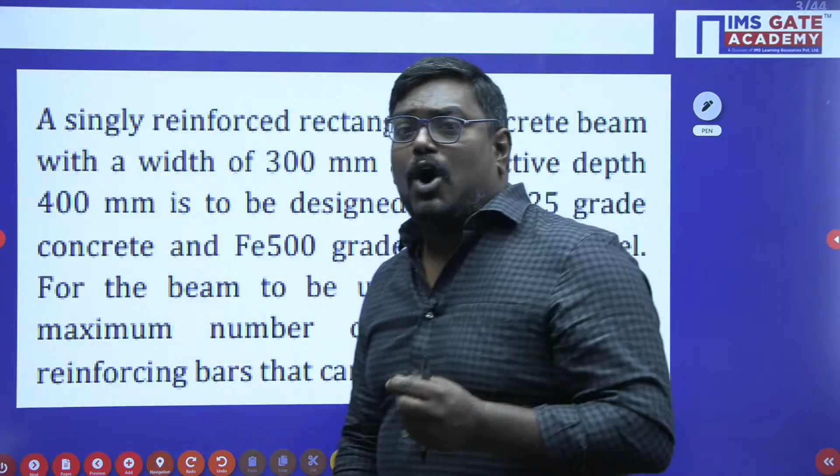Quickly I will move on to the top 10 challenging questions topic. Here we have a beautiful question. When I talk about this question in RCC, it has a weightage of around 4 marks in the GATE exam. Whatever questions I cover, please concentrate on these topics rather than the questions themselves, and give more importance to the concept.

Here is a question: A singly reinforced concrete beam with a width of 300 mm and an effective depth of 400 mm is to be designed using M25 concrete and FE 500 grade. For the beam to be under-reinforced, what is the maximum number of 16 mm diameter bars?

Let us understand what we mean by under-reinforced, over-reinforced, and balanced section. Practically it is impossible to have a balanced section. Then your friend will ask, sir, why are we assuming a balanced section? To find the depth of the neutral axis, we assume the section to be balanced.

What do you mean by under-reinforced? When the amount of steel provided is less than the amount of steel required, we call it under-reinforced.

If you consider a match between India and Zimbabwe, Zimbabwe are rated as underdogs. So under-reinforced means whatever is required is provided less. Here the failure is obviously in steel because you are providing less steel. Since steel is a ductile material, it shows a clear sign of failure. That is why practically all sections are designed as under-reinforced.

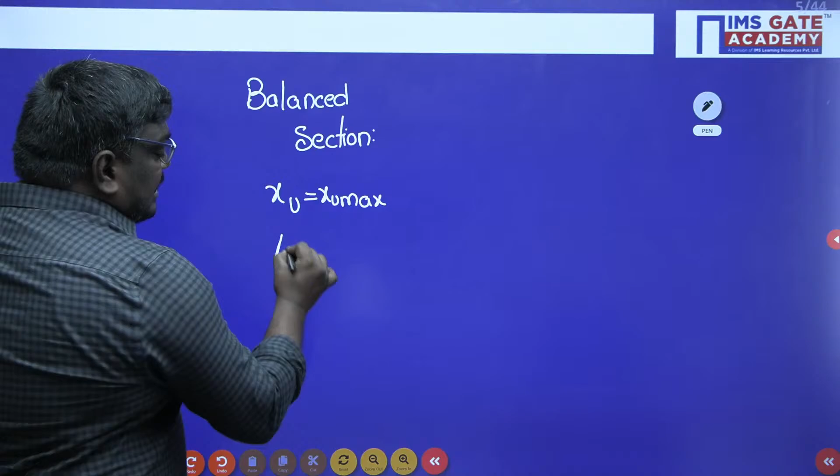Now, for a balanced section, what do you mean? That means the amount of steel required to balance the section, that much amount of steel is provided. So the conditions for balanced section are XU equal to XU max, and AST equal to AST limiting.

If I consider the section to be balanced, we can find the limiting area of steel, by considering compression force equal to tension force. Compression force is 0.36 FCK B into XU max, and tension force is 0.87 Fy into area of the steel.

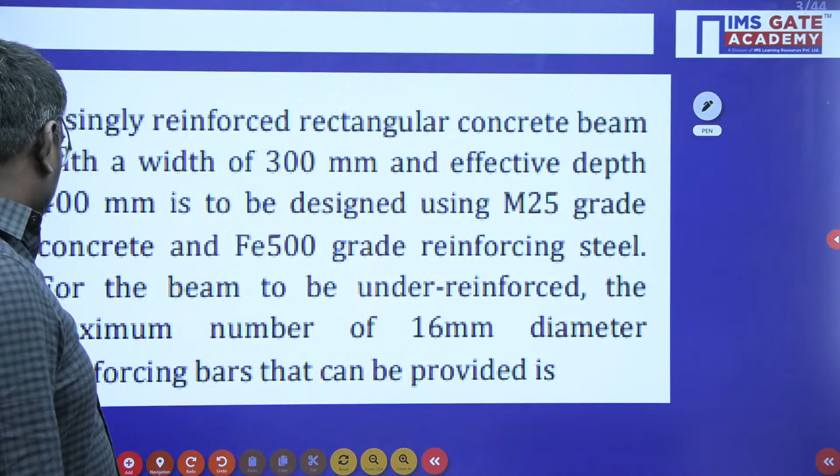So what is the grade of concrete we will see? The grade of concrete is M25, the width of the section is 300, and effective depth is 400. Now based on the grade of the steel, XU max values change.

If it is mild steel or Fe250, XU max value will be equal to 0.53D. If it is Fe415, HYSD bar - high yield strength deformed bars - we call it 0.48D. And if it is Fe500, this will be taken as 0.46D.

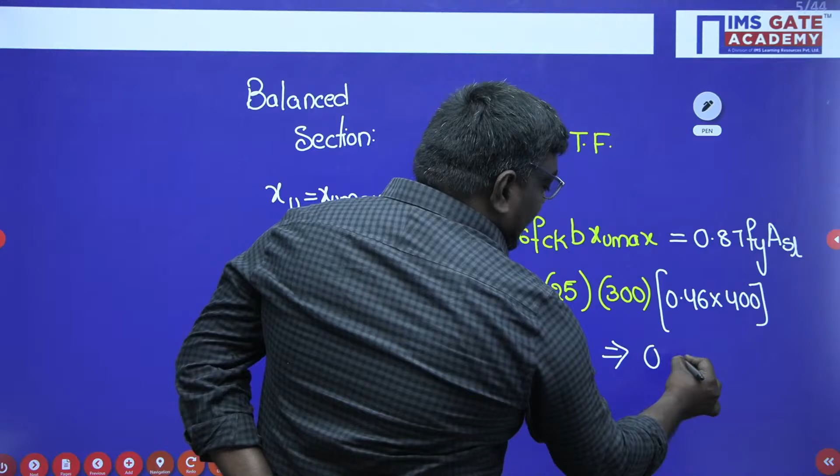In this problem, it is clear that the grade of steel is 500. So I will take 0.46 into D, where effective depth is 400 mm. Now let us solve: AST equal to 0.87 Fy, where Fy, yield strength of the steel, is 500. In balanced section, area of steel and limiting area of steel are both the same, so we take AST as the limiting area of steel.

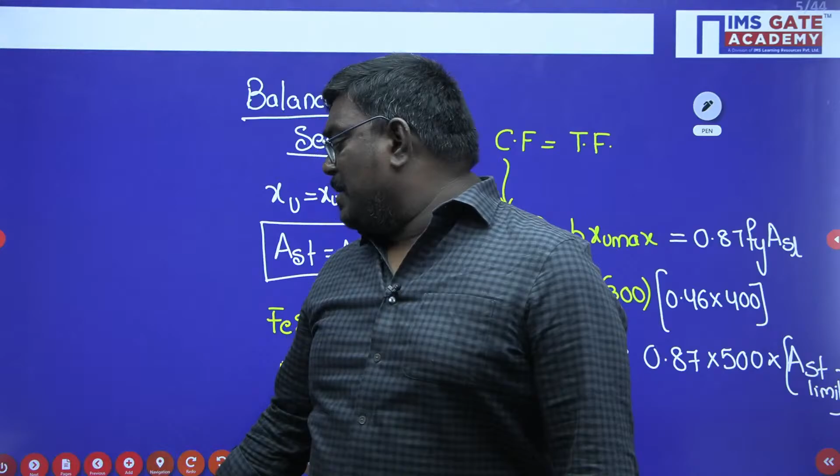Again, the grade of concrete is M25, width of the section is 300, effective depth is 400 - these are the values given in the data. Now we have only one unknown. So after solving, the limiting area of steel, AST limiting, will be equal to 1142.06 mm square.

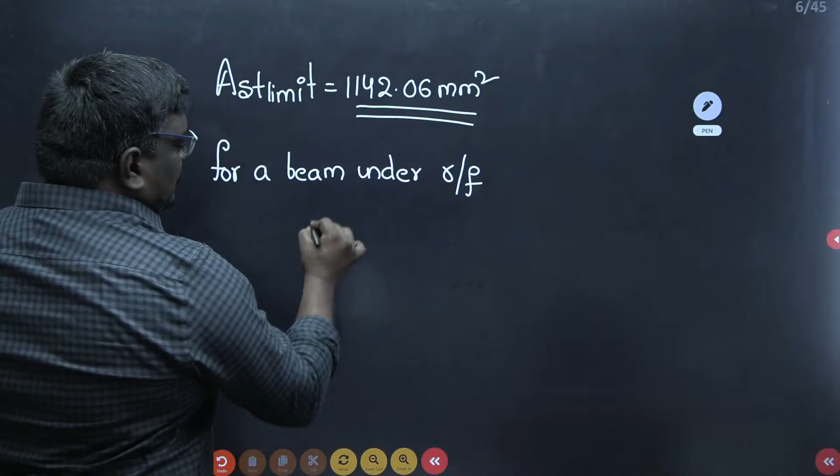But what he is asking is, for a beam to be under reinforced, what is the maximum number of bars? So for the beam to be under reinforced, AST should be less than AST limiting. He is asking for the number of 16 mm bars, so n into pi by 4 into 16 square is equal to 1142.06.

If you consider this, the number of bars you will get is 5.68. But most students might write the answer as 6. If you write 6, this is absolutely wrong, because when you provide more area of steel than the limiting area of steel, the section becomes over reinforced.

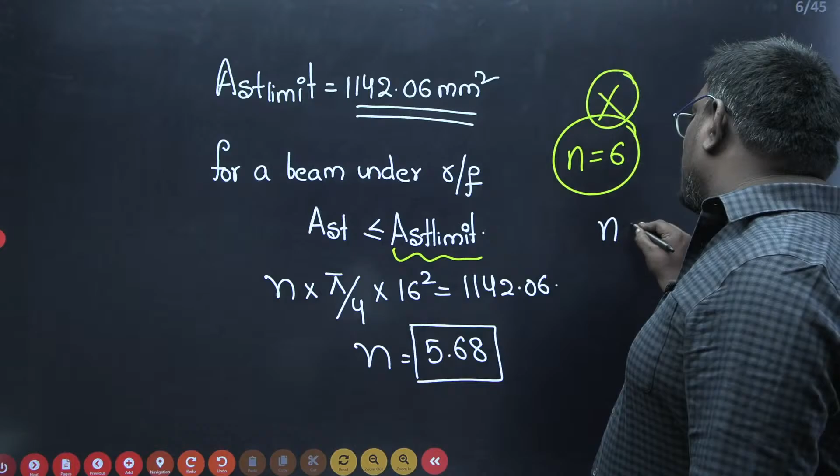But for a beam to be under reinforced, 1 16mm bar is correct, 2 16mm is correct, 3 16mm is also correct. But what he has asked in the problem is, what is the maximum number of 16mm dia bars? So in that case, my dear students, the maximum number of bars that can be provided for a section to be under reinforced is 5.

Again and again I am insisting and consistently telling you, for any section to be under reinforced, XU should be less than XU max, and AST should be less than the limiting area of steel. So my dear students, to solve this problem, first I have to find out the limiting area of steel. How can I find the limiting area of steel?

I assume the section to be balanced. Based on the balanced concept, I have calculated the limiting area of steel as 1142.06 mm square. But for a beam to be under reinforced, the amount of steel you are providing should be less than that.

So I have got number of bars as 5.68. But if you write the answer as 6, providing more steel than required, then it becomes an over reinforced section, where your assumption itself will be wrong.

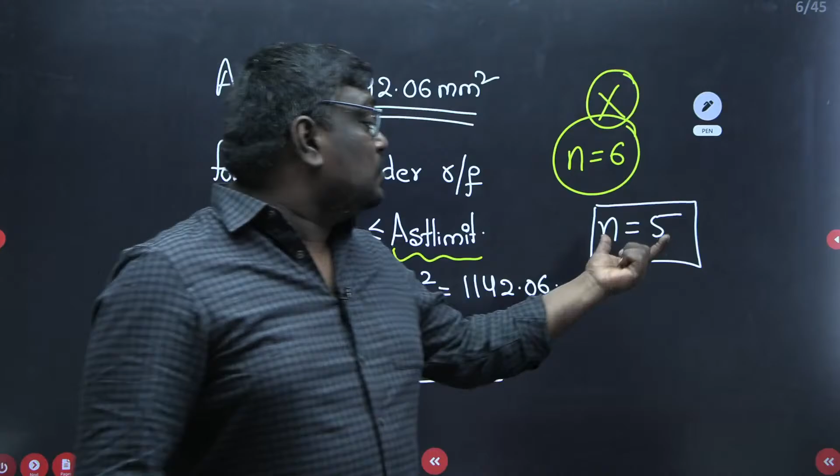But the beauty of the question is this - the answer could be 1, 2, 3, 4, or 5. But to eliminate that ambiguity, he has used the word 'maximum number of bars.' So when I consider the maximum number of bars, the answer will be 5.

I hope this solution is clear and you are enjoying this session. Now let us go into the next question.

Whenever you are following the GATE exam pattern or writing the GATE exam, it is my sincere advice to all GATE aspirants, whenever you are given a question, please go through it completely with the given data for at least 30 to 45 seconds. Because understanding the question and the given data, please write whatever the given data is on paper so that you can strike upon which formula you have to use. This is very important for your success in the GATE exam. So please read the question carefully.

A haunched varying depth reinforced concrete beam is simply supported at both ends. The beam is subjected to a uniformly distributed load of intensity 10 kilonewton per meter. Find the design shear force of the section. Beautiful question, let us see.

See students, it is a varying section. First of all, it is a varying section. Now, when I consider the design shear force, which we show as VDS - actually, design shear force can be written as VU plus or minus M by D tan beta. This is the formula to calculate the design shear force for a varying section.

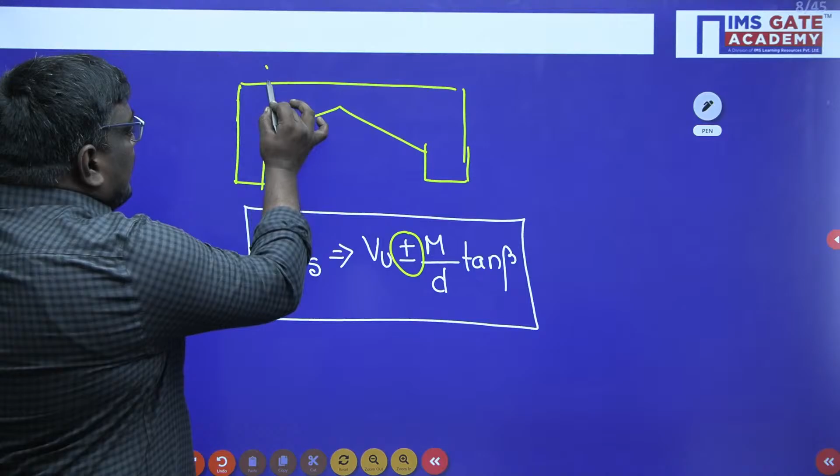Now the challenging aspect here is, when do you use the positive sign and when do you use the negative sign? See, here in a simply supported beam, if you consider the bending moment diagram, it will be something like this - maximum at the center and minimum at the ends. So my dear students, as the depth is increasing, the moment is decreasing.

In this case, you will use the positive sign. If the depth is increasing and the moment is increasing, then we will use the negative sign. Let us have clarity on this.

As depth increases, moment decreases. As depth increases, moment decreases. When the depth is increasing and the moment is decreasing, in this case, what will you be using, my dear students? You will be using the positive sign.

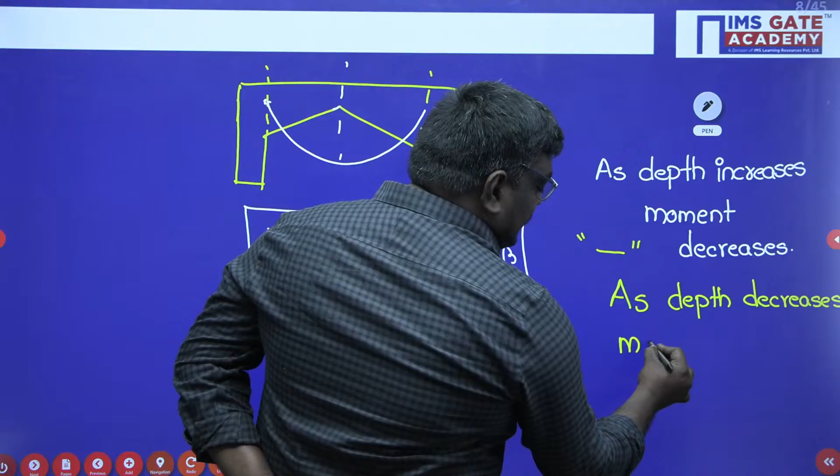Okay, now as depth decreases, moment... depth is decreasing, so here you can say moment is also decreasing. Or you can write here one more thing - as depth increases, to avoid confusion, moment decreases.

What, sir? See students, as depth increases, moment decreases. As depth increases, moment decreases. So here, as depth increases, moment decreases - depth is increasing, moment is also decreasing. In this case, you will use the positive sign.

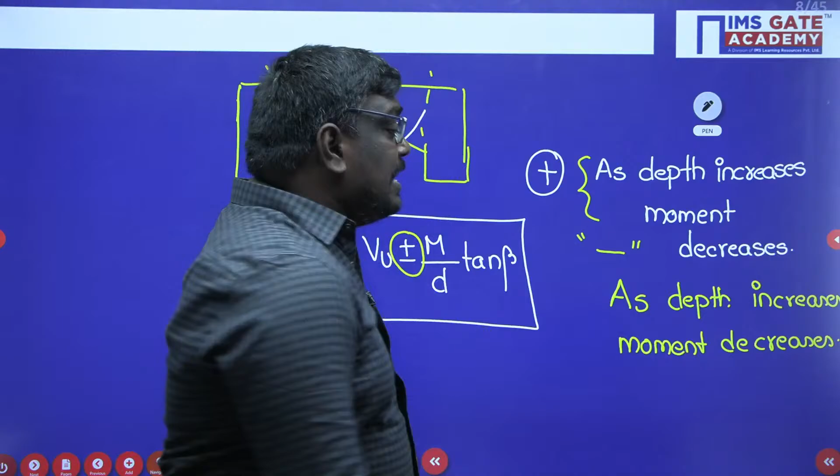When do you use the negative sign, sir? As depth is increasing, moment is also increasing. You should write here, moment increases.

Are you getting my point? One case is depth is increasing, moment decreasing. In this case, you will use positive sign. If depth is increasing, moment is also increasing, then you will use negative sign. So, in this question, whether we have to use positive or negative sign, the answer will be positive sign, because as the depth is increasing in this section, the moment is decreasing, so we will use positive sign.

So let us conclude that design shear force is equal to Vu plus m by d tan beta. Why are we having positive sign here? As depth is increasing, moment is decreasing, that is why we are using the positive sign.

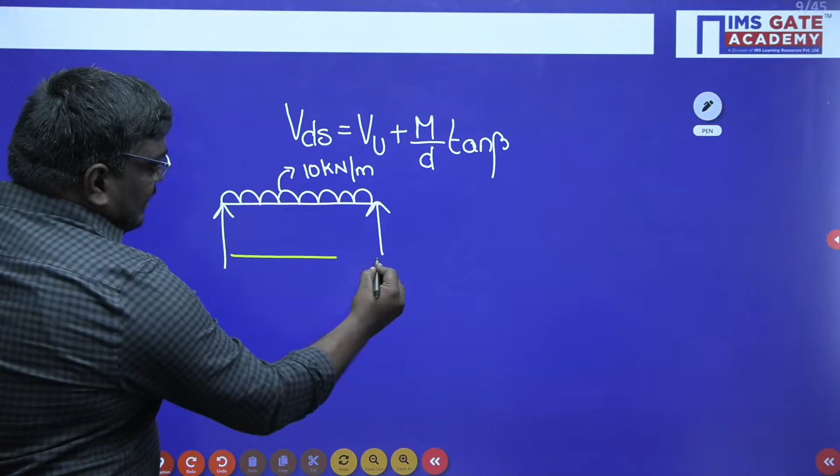Now consider a simply supported beam carrying a load of 10 kilonewton per meter, with a span of 20 meter. What will be the reaction here? It will be equal to WL by 2, and here also WL by 2. So this will be equal to 10 into 20 upon 2, which is equal to 100 kilonewton.

So the reaction at supports will be equal to 100 kilonewton. But he is asking what is the reaction at a section XX, which is at a distance of 5 meter. So if I calculate Vu, that is shear force at the section XX at 5 meter, you can write it as the reaction 100 minus 5 into 10, W into X bar. So the shear force at that section will be equal to 50 kilonewton.

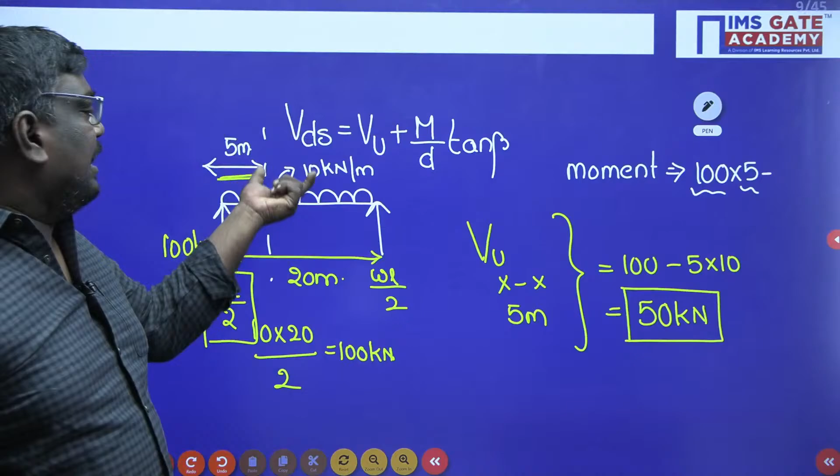Now if you talk about the moment, what will be the moment at that section at 5 meter? We have reaction 100, so 100 into 5, this is force into perpendicular distance, minus the UDL load of 10 kilonewton per meter occurring at a distance of 5 meter at the center. If you calculate this, moment will be equal to 375 kilonewton meter. Now, if you see, the depth at the center is how much?

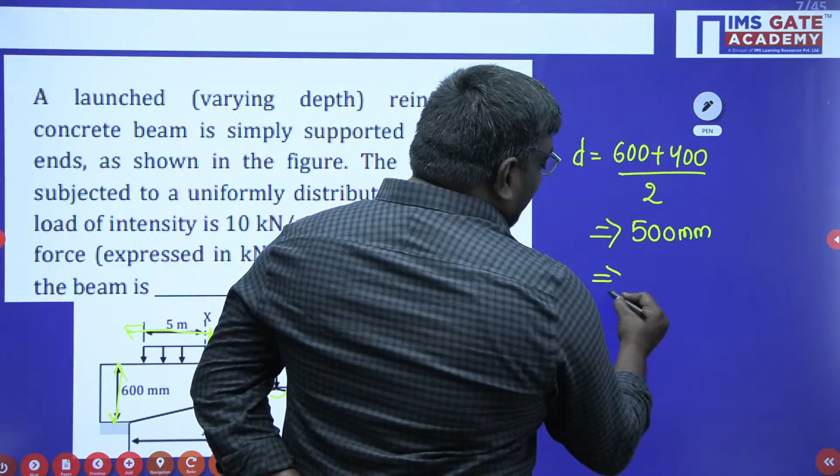The depth at the center is 400 mm, the depth at the support is 600 mm, and the overall span is 10 meter up to here. He is asking at the center. So you can directly write depth is equal to 600 mm plus 400 mm by 2, which will be equal to 500 mm, or 0.5 meter.

Now, if I talk about the design shear force at that section, we have the formula Vu plus m by d tan beta. What will be tan beta value? If you see the section here, the span from here to here is 10 meter, and this depth is 400 mm, and this will be equal to 600 mm. So this value will be equal to 200 mm, and this value will also be equal to 200 mm.

So what is this value beta? Here tan beta can be written as 200 divided by 10,000, because 10 meter is 10,000 mm. So if I calculate here, you will get tan beta is equal to 0.02.

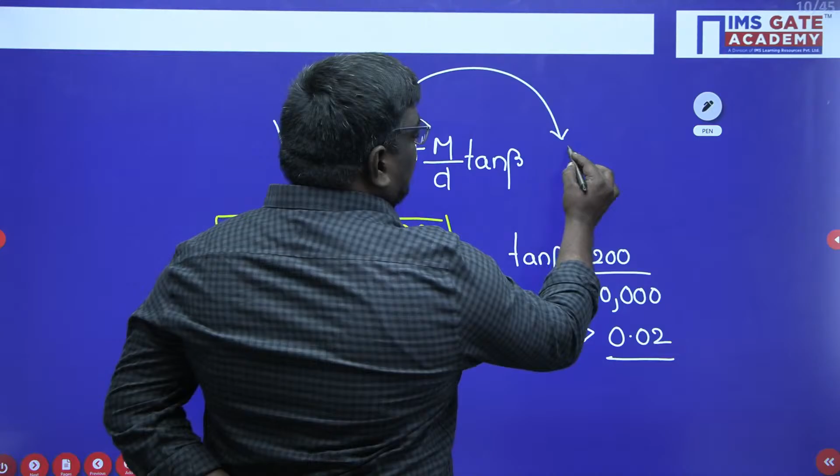Now when I talk about the design shear force, shear force is equal to 50, plus moment is 375 kilonewton meter upon depth, which is 0.5 meter into 0.02. So if you solve this, you will get 50 kilonewton plus 15 kilonewton, giving the final answer as 65 kilonewton.

So whenever you are solving the GATE question, you have to read the question carefully. If it is for a uniform section, whatever you learn in strength of materials, SOM, that is directly applicable here. But when I talk about a varying section, in the concept of shear, we will explain this: for a varying section, the design shear force is given by the formula Vu plus or minus m by d tan beta, where Vu is the shear force at that section, m is the moment at that section, and d is the depth at that section.

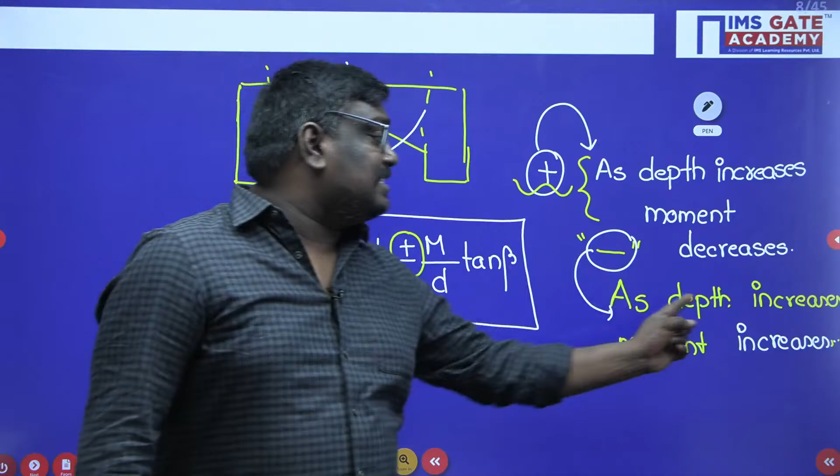When do you use positive sign? As depth is increasing, moment decreases, you use positive sign. As depth is increasing, if moment also increases, then you use negative sign. Sir, I have given you an example for a simply supported beam, we will be using positive sign there.

But if you see a cantilever beam, students, here the depth is increasing and at the same time the moment is also increasing. So in this case, you will be using negative sign. I hope you are clear with this problem and you have enjoyed it.

Now my dear students, this is a very important problem. Assume a straight line instead of parabola. For a straight line, partial safety factor is 1, and a rectangular under-reinforced concrete section of 300 mm and 500 mm effective depth is reinforced with 3 bars of grade Fe415, each of 16 mm dia. Concrete mix is M20. Find the depth of the neutral axis from the compression fiber, as per IS 456.

Now here I will tell you some important concepts. There is a method called limit state method. What do you mean by limit state method? Previously, there was a method called working stress method. But nowadays, people are using the limit state method because it is more beneficial from both the safety point of view and the economical point of view.

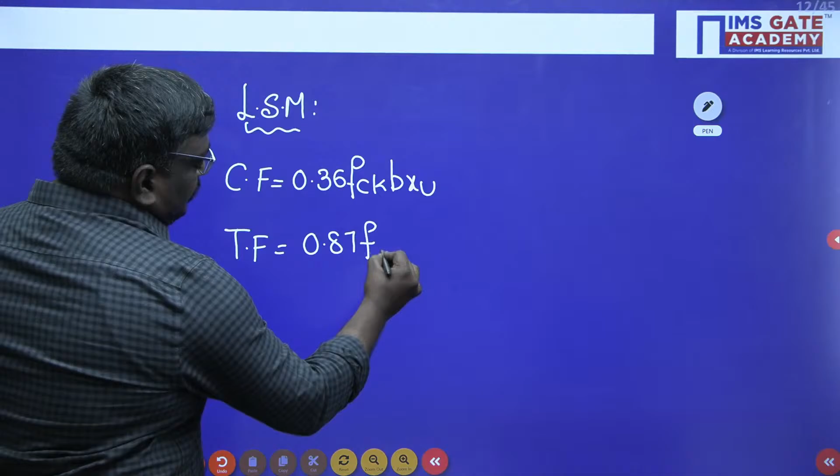In LSM method, the stress-strain curve is assumed as rectangular parabolic. Based on that, calculations give us compression force equal to 0.36 FCK B into XU, and tension force equal to 0.87 Fy AST. The lever arm is given by the formula D minus 0.42 XU. These are all the important formulas from the IS 456 code.

Now let me tell you the stress distribution in this problem. If I take this as a singly reinforced section, the stress distribution is triangular and rectangular, not rectangular parabolic as per the code. But in this question, they have given it as triangular, and the strain diagram varies linearly.

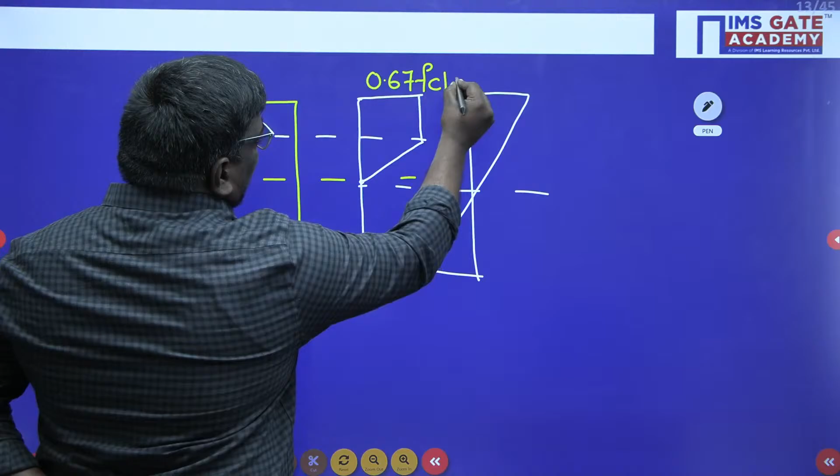Now see students, what is the stress given in the problem? It is 0.67 FCK. Why is it 0.67 FCK? Actually, the partial safety factor for concrete is normally 1.5, so when you divide 0.67 FCK by 1.5, you get 0.446 FCK. But in this problem, the partial safety factor is given as 1, so 0.67 FCK divided by 1 gives 0.67 FCK.

So I take the stress as 0.67 FCK, and the strain value is 0.002. If I take the depth of neutral axis as XU, I take this distance as X dash. Now from similar triangles we can write: here the strain value is 0.0035. How do I know 0.0035? From the code.

So here I can write XU divided by 0.0035 is equal to X prime upon 0.002. Now X prime can be written as 4 by 7 XU. So what will be the remaining value? The remaining depth will be XU minus 4 by 7 XU, which equals 3 by 7 XU.

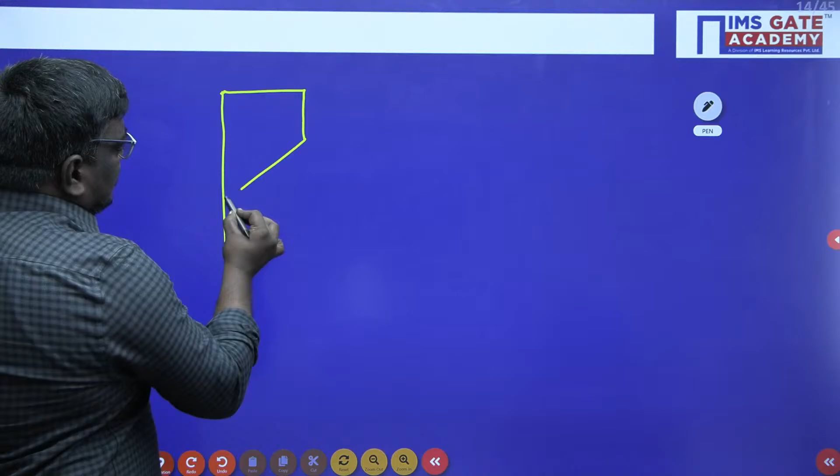Now we will write the compression force here. I am writing the diagram again for your easy understanding. This is 0.67 FCK.

This is 3 by 7 XU. And this value is 4 by 7 XU. Now my dear students, what will be this?

How to solve this: compression force, sir, how do you calculate force? Force is nothing but the area of the pressure diagram, or the area of the stress block. So compression force can be written as 0.67 FCK into area. Sir, this is a rectangular block, right? I can write it as B into

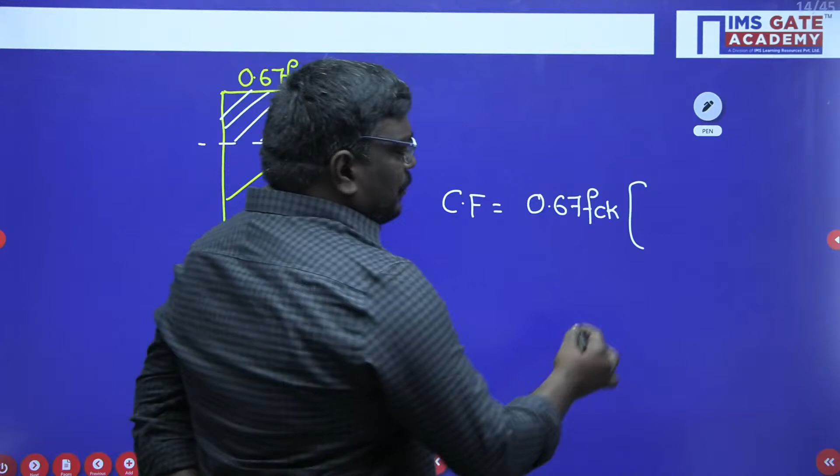3 by 7 XU. And for the triangle, how can you write it? This is the triangular part, which will be equal to half into base into height. So you can write it as half into B into 4 by 7 XU. So this will be the compression force.

Okay sir, now what will be the tension force? Tension force, there will not be any change. It will be equal to 0.87 Fy AST.

Now see, you know the compression force, you know the tension force. What will be the compression force, sir? What is the grade of concrete given there? 3 bars of Fe415, 500 mm, 3 bars, and M20 grade.

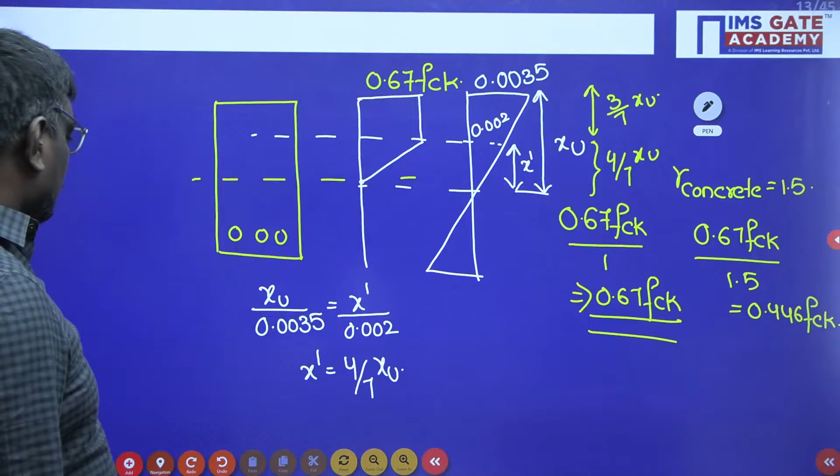Let us solve. Sir, compression force can be written as, if I write here, 0.67 FCK. FCK is how much, sir? 20 grade. 0.67 FCK, okay, B into XU.

Width is 300. XU you don't know. Plus B into XU, sir, plus half into

B is 300. Sir, XU means what? Here it is 3 by 7 XU, so into 3 by 7. Here it is B, 4 by 7. Half into B into 4 by 7 XU.

B into 3 by 7 XU is equal to... what is the grade of steel? The grade of steel is how much, sir? I think it is 415. So you should be writing 415, and 3 bars of 16 mm dia. So 415 grade of steel.

And how much, sir? 3 bars of 16 mm dia. 3 into pi by 4 into 16 square.

So what will be the depth of neutral axis? Can anyone tell me, what will be the depth of neutral axis? Sir, depth of neutral axis XU will be around 75.8 mm. If you solve this, you can approximately take it as 76 mm. So the first case, whatever he asked in part 1, you will get the answer as 76 mm.

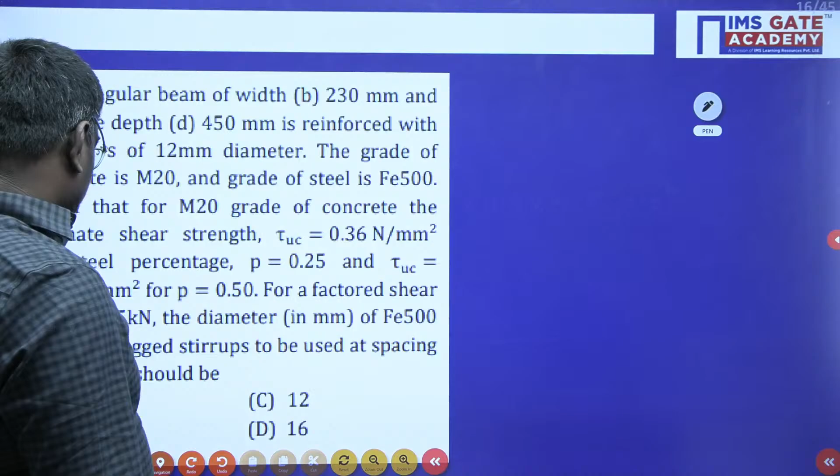In the second case, he wants us to tell as per IS 456. Sir, as per IS 456 means we already know what do you mean by compression force. I told you compression force is equal to what, sir? Compression force is equal to tension force.

If I apply here, what is compression force? 0.36 FCK B into XU is equal to 0.87 Fy into AST. So this is the formula for what, sir? Compression force and tension force.

So here what is compression force? What is the grade of concrete? 20. What is the width of the section? 300. We don't know what XU is equal to, 0.87. What is the grade of steel we have? 415.

And what is the area of steel, sir? Area of steel is 3 bars of 16 mm dia, so 16 square. So if you solve this, what will be the XU value? Can anyone tell me?

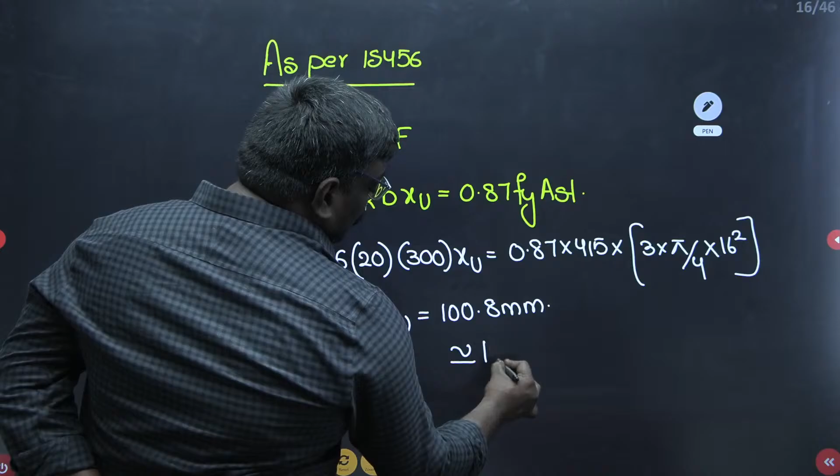Sir, see, XU value will be roughly around 100.8 mm, okay, or you can approximately assume it as 101 mm. But he is not asking what is XU.

He is asking what is the difference in XU calculated in the previous case and in the present case. So the difference in depth of neutral axis can be written as 101 minus 76. This will be equal to 25 mm.

What is the difference in depth of neutral axis? The difference in depth of neutral axis is taken as how much, sir? 25 mm. So see here, the options are: one is 76 mm, correct? And the other one we have is option C, that is 25 mm.

So my dear students, let us explain what do you mean by limit state method. In limit state method, sir, according to IS 456, the stress distribution is rectangular parabolic and the strain distribution is linear.

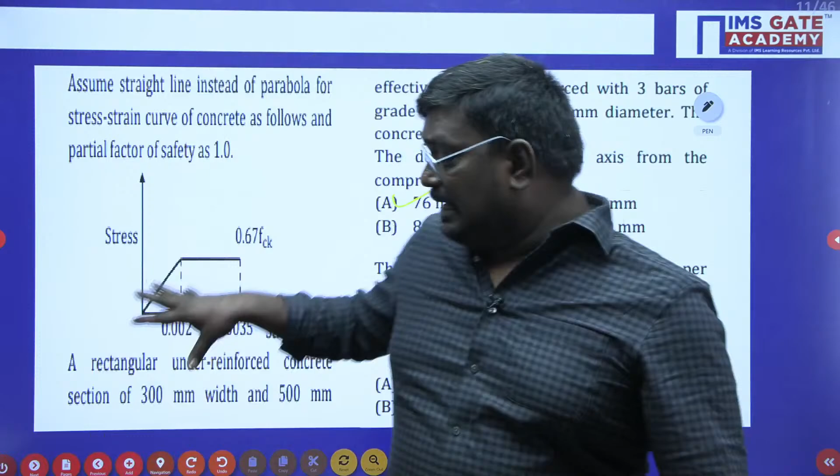When I talk about the rectangular parabolic, students, we have the standard formulas, like we have derived: compression force 0.36 FCK B into XU is equal to tension force, which is 0.87 Fy AST. But in this problem, instead of rectangular and parabolic,

here he has given triangular and parabolic, triangular and rectangular. So here what I would like to tell you is, there is a clause in IS 456 which says that the stress strain distribution can be any shape if the test results are satisfied.

Based on that, they have framed this question. IS 456 says the stress-strain diagram need not be rectangular-parabolic. It can be any shape, but the clause is that the test results should be satisfied. So here they have given it as triangular and rectangle.

But here if you see the grade of concrete, it is 0.67 FCK, and the partial factor of safety is 1. Using this, I have derived the compression force, which is the area of the stress diagram. Whereas traditionally in IS 456, the partial safety factor for concrete is 1.5, but in this problem they have given the partial safety factor as 1. That is the reason I have taken stress as 0.67 FCK. I hope this solution is clear for you.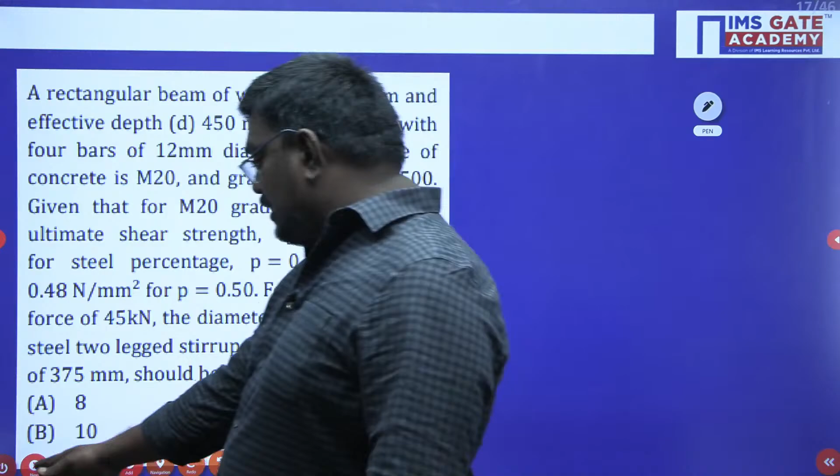Before understanding shear, it has been very important because to understand the depth of foundation, we want to study shear. The depth of the foundation depends upon one-way shear or two-way shear, and based on the shear criteria we take the depth of foundation. There can be different cracks in RCC - flexural cracks or shear cracks. If you have high shear force, there is a possibility of shear cracks. So to avoid shear cracks and to estimate the depth of foundation, students should have a better understanding of shear. If you want to succeed as a structural engineer, even though the marks are less in the GATE exam, for a better perspective in design, RCC subject is very important, and if you want to join industry as a structural engineer, the RCC code book is also very important. So let us go into shear.

First I will talk about the nominal shear stress. What do you mean by nominal shear stress? It is nothing but tau V equals Vu upon Bd. Nominal shear stress, tau V is equal to Vu upon Bd.

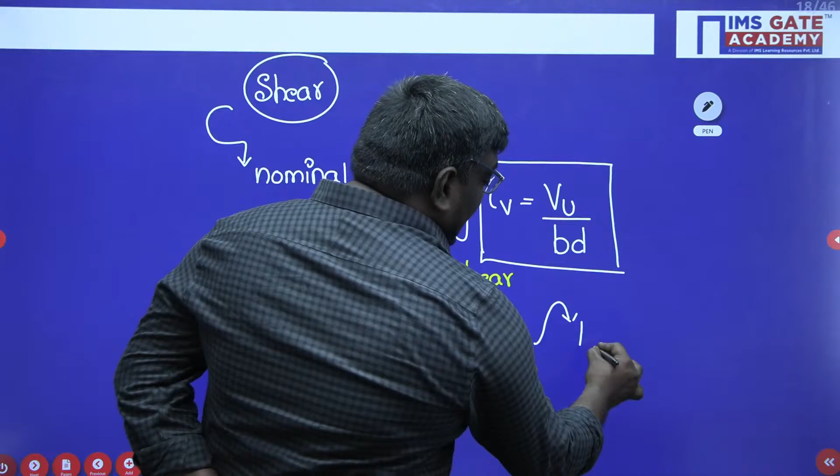If tau V is less than 0.5 tau C, no shear reinforcement is required - this is very important. If tau V is less than tau C, there should be minimum shear reinforcement. You should be aware of the formula: minimum shear reinforcement is given by ASV upon B into SV equals 0.4 upon 0.87 Fy. This is a very important concept, I am expecting this in the exam - I am not sure, but this shear concept is very important.

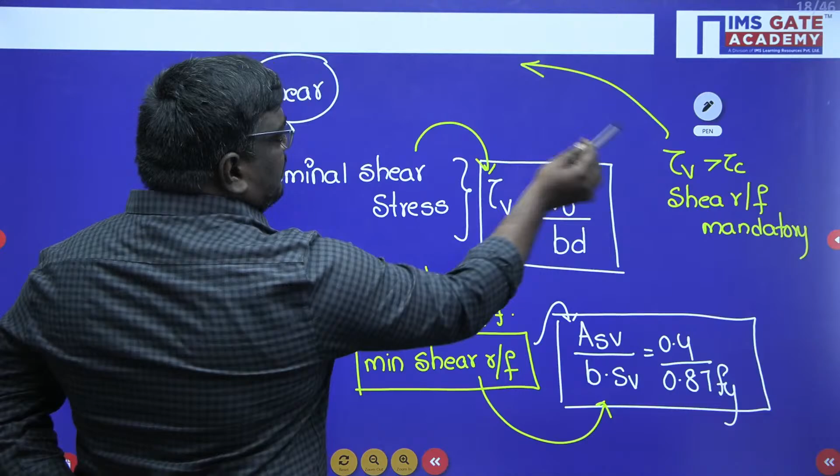If tau V is greater than tau C, shear reinforcement is mandatory. So what is the formula here? This is the formula for nominal shear stress, this is the formula for minimum shear reinforcement. For mandatory shear reinforcement, design shear force equals 0.87 Fy ASV into D upon SV. Now let us go into the problem.

First, we will calculate tau V. Tau V is nothing but shear force divided by B into D. So, what is the shear force given in the problem? B is 230 mm, effective depth is 450 mm, and the shear force is given as 45 kilonewton.

Now we will calculate the nominal shear stress. Nominal shear stress is shear force, which is 45 kilonewton, so 45 into 10 power 3. Now width of the section, B, is 230 mm, and the effective depth is 450 mm.

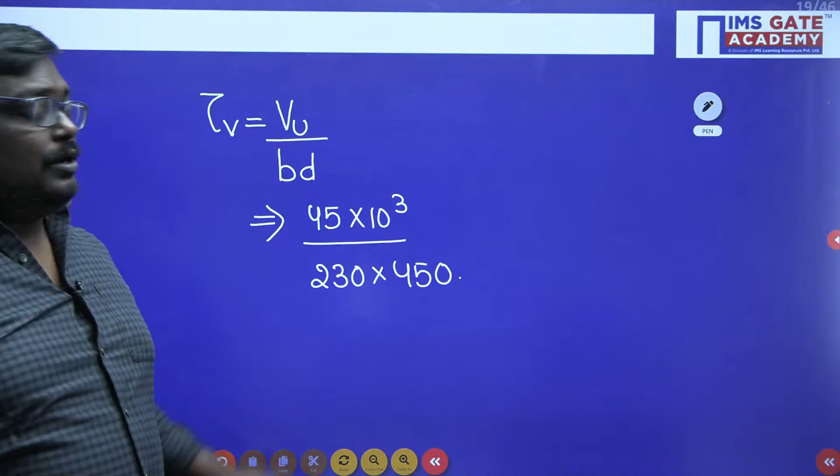So tau V is equal to how much? Tau V can be written as 0.434 Newton per mm square.

Now, how do you calculate tau C here? Tau C depends upon two things: it depends upon the grade of concrete and also the percentage of steel. So here, percentage of steel we have to calculate as AST by BD into 100.

So what is the area of the steel given in the problem? It is reinforced with 4 bars of 12 mm diameter.

So if I calculate PT, it is 4 into pi by 4 into 12 square. The width of the section is 230 mm and depth of the section is 450 mm.

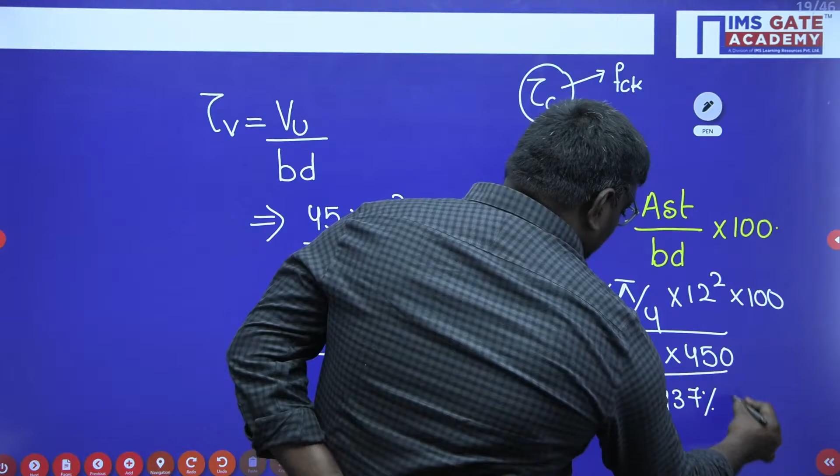So what will be this value of percentage of steel? If you calculate here, the percentage of steel will be equal to 0.437%. Now, students, they have given the tau C value for a PT value of 0.25 percentile, and for a PT percentile of 0.5.

Tau C for PT equal to 0.25, they have given as 0.36. For 0.5, they have given as 0.48. Now, what is your intention?

You have to find the permissible shear stress, tau C, for a percentage of steel we got, which is PT value 0.437. So for a percentage of 0.43 percentile, what will be this value? How to calculate this?

By interpolation, sir. For 0.25 it is 0.36. So this will be equal to 0.36 plus, 0.48 minus 0.36 upon 0.5 minus 0.25, into this value multiplied by 0.437 minus 0.25. This is nothing but interpolation: find the difference between these two, and find the fraction, then multiply by the value for which you are finding.

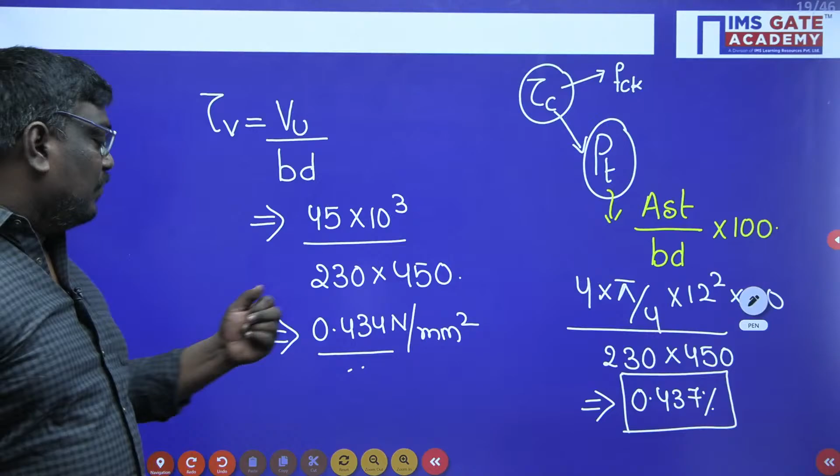Now see, students, tau V we got is 0.434. From the question, it is evident that tau V is less than tau C. When tau V is less than tau C, we will be providing the minimum shear reinforcement.

Spacing is 375 mm. So here you can say 2 into, we have to find out the diameter of the bar.

So 2 into pi by 4 into d square upon width of the section is 230 mm. Spacing they have given as 375 mm is equal to 0.4 upon 0.87. Grade of steel is how much, sir?

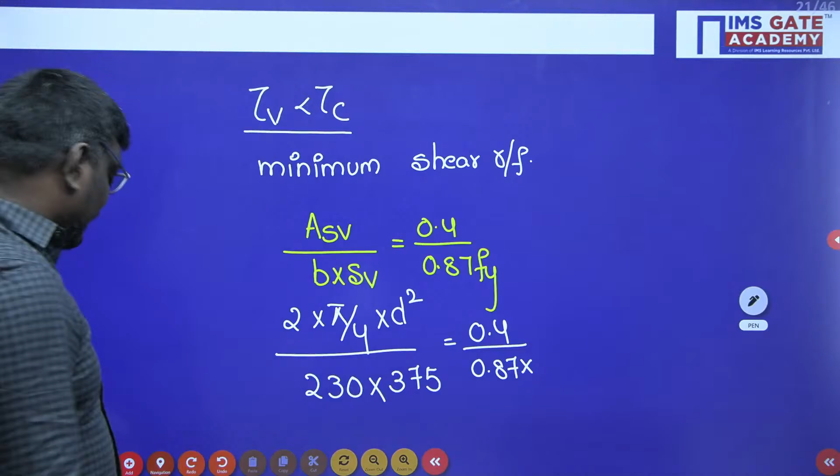Sir, if they have given mild steel, you take mild steel 250. But here they have not mentioned Fe grade. Let us check whether they have used Fe 400 or Fe 500. Sorry, Fe 500 they have given. So here you should write grade of steel is given as Fe 500.

On solving this, students, the dia of bar you will get is around 7.1 mm. A dia bar cannot be a fraction like this. So the dia of bar answer will be 8 mm. I hope this solution is clear for you.

Now my dear students, let me explain the insight of shear. What do you mean by shear? Shear is responsible for cracks and the depth of foundation depends upon shear, sir. So there can be two chances: either cracks or the depth of the foundation.

Now students, we call tau V as nominal shear stress and tau C as maximum permissible shear stress. When tau V is less than 0.5 tau C, no shear reinforcement is needed. When tau V is less than tau C, we provide minimum shear reinforcement using this formula.

This formula is very important. Why have I used 2 here? Because it is a two-legged stirrup. If they use the word two-legged, you should be very careful.

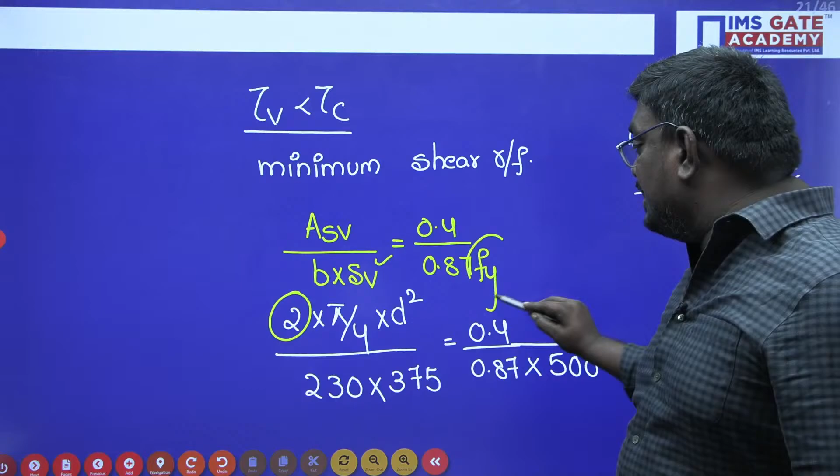SV is known as the vertical spacing. Fy is the grade of the steel. When I am using Fy, grade of steel, you have to be very specific, because the main steel grade might be different and the stirrup grade might be different. So please be cautious while solving this problem. I hope this solution will help you solve the problem.

Now students, this is a beautiful question. According to the concept of limit state design, what is the probability of failure of the structure? Sir, why is the LSM method highly appreciated?

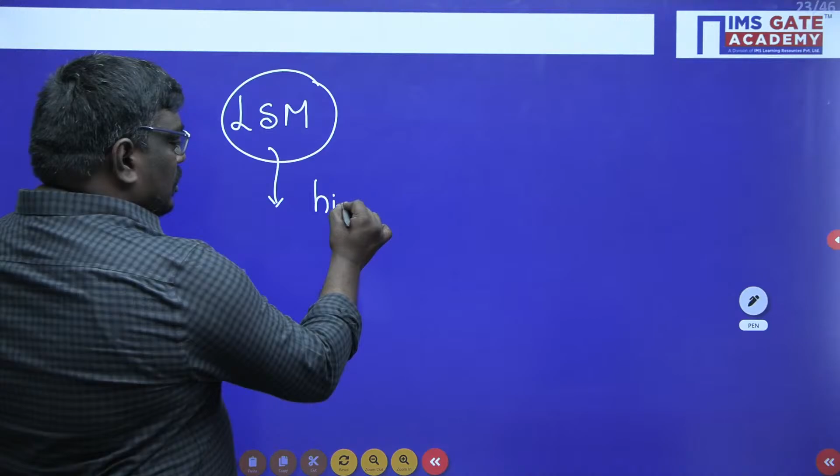Why is LSM method highly appreciated, sir? Because it is designed for higher loads and designed for lesser strength. Why LSM method is highly appreciated: it is always designed for higher loads and lesser strength. This will ensure double safety.

As a design engineer, structural engineer, we always take safety as the highest priority. As it ensures double safety, we go with the LSM method.

But in this problem, what he has asked is, according to the limit state method, what is the probability of failure of structure? So how the structure can fail, we have to study. How the structure can fail can have an impact on this problem. Structure can fail in two ways.

Either case is: if the load is more than the design load, then obviously failure will happen. So if the load is more than the design load, failure will happen.

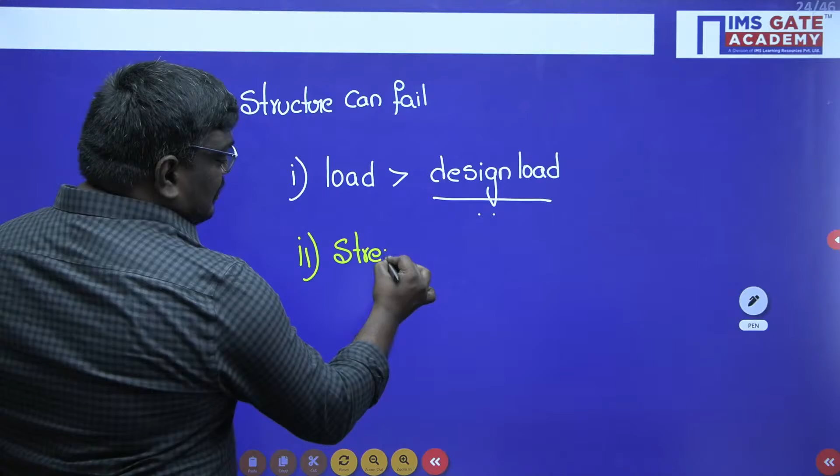Next case is, if the strength is less than the characteristic strength, then also failure will happen. Because strength is less than the actual strength - it should have a strength of some 100, if it is having 80, then also failure will occur.

Or there can be a case of both: load greater than design load and strength less than characteristic strength. So my dear students, how do we solve this problem? First, to take the probability into action: if the load is greater than design load, the probability of failure of the structure is only 5%.

Sir, see, three cases can affect here: load failure alone, these are two independent events - if you study probability, dependent and independent events, you can have an idea - and strength fail alone.

And both fail - both strength and load will fail.

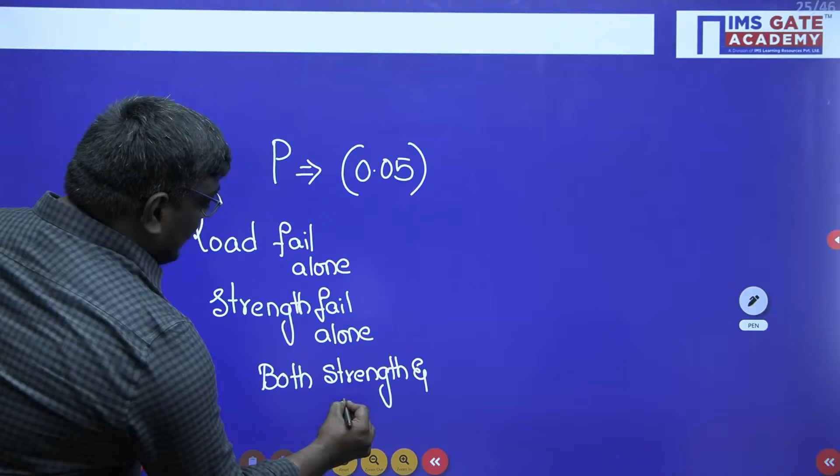Sir, whenever they are independent events, if they have given you P of A intersection B, if they are independent events, you can write it as P of A into P of B. Same concept I will apply here. First, load failure is 0.05 and strength is passing, so 95 percentile it will pass. Characteristic strength means it is the strength at which 95% of the test results are expected to pass. So this is one combination.

Other thing is, load will pass 0.95 and strength will fail.

So it will be 0.0475. And the other case is both failure, where both strength and load will fail. So this case will be 0.0025. This is load failure and also strength failure. If you solve this, you will get a value of 0.0975. So the probability of failure of structure can be written as 9.75 percentile. I hope this solution is clear.

So what are the key points in this problem? Either load can be more than design load, or strength can be less than characteristic strength, or both load and strength can be lesser than the allowable values. Both the cases can fail, so these are the cases where a structure can fail. I have taken these three into account and calculated both, because strength and load are independent factors. I applied the probability rule and got the value as 0.0975. I hope this solution is clear for you.

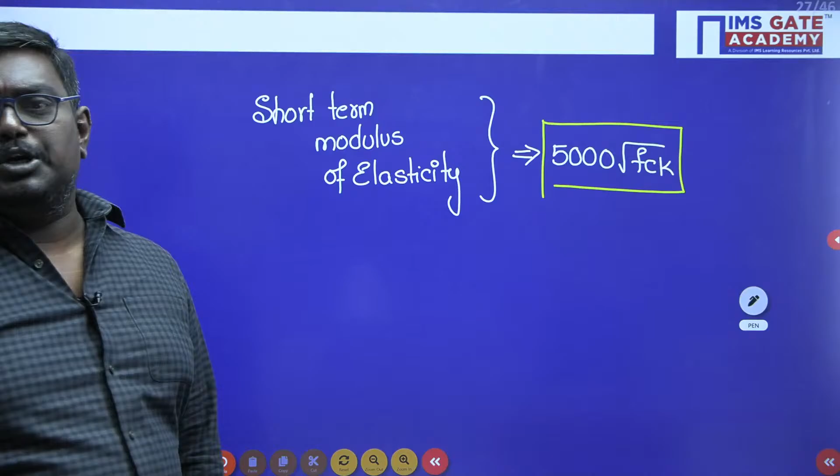Now see students, if they consider the short-term modulus of elasticity. Previously, according to the old code, short-term modulus of elasticity was given as 5700 root FCK. But with the revised code, the short-term modulus of elasticity is given by the formula 5000 root FCK. So the short-term modulus of elasticity is equal to 5000 into root FCK.

What is root FCK, sir? The grade of the concrete is 25, so you can write here 25,000 Newton per mm square. So the short-term modulus of elasticity is 25,000 Newton per mm square.

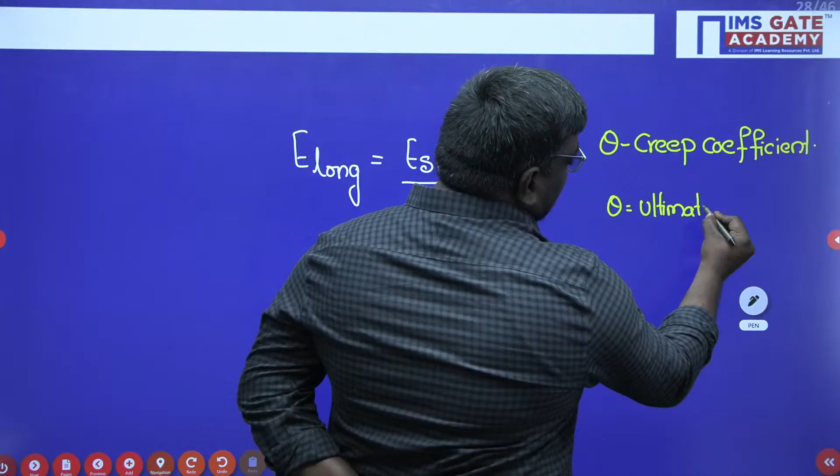Now, my dear students, what do you mean by long-term modulus of elasticity? The long-term modulus of elasticity is given by the formula: short-term modulus of elasticity upon 1 plus theta, where theta indicates the creep coefficient. Theta is nothing but the creep coefficient, which can be written as ultimate creep upon elastic creep.

So if I substitute creep coefficient 1 in this, you get short-term modulus of elasticity as 25,000 Newton per mm square upon 1 plus theta, where theta is 1. So you'll get a value of 12,500 Newton per mm square. So the long-term modulus of elasticity is also 12,500 Newton per mm square.

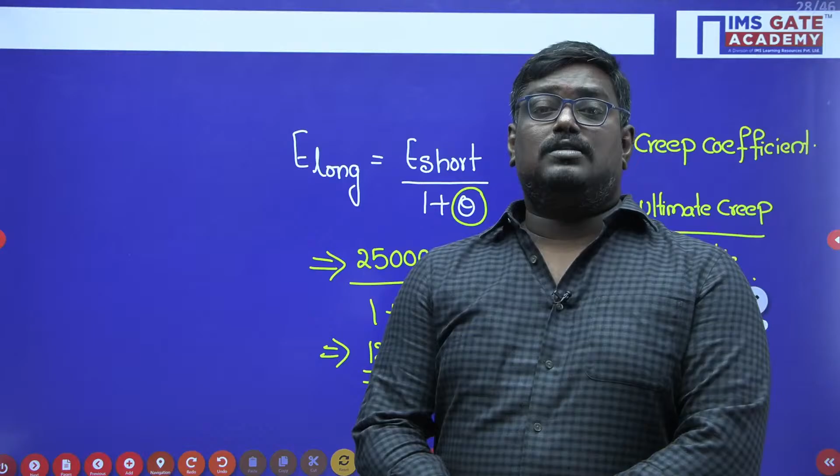So students, what I would like to tell you here is, short-term modulus of elasticity is given by the formula 5000 root FCK. Long-term modulus of elasticity is given as short-term modulus of elasticity upon 1 plus theta, where theta is the creep coefficient, and theta is defined as ultimate creep upon the elastic creep. I hope this solution is clear. Let us move on to the next question.

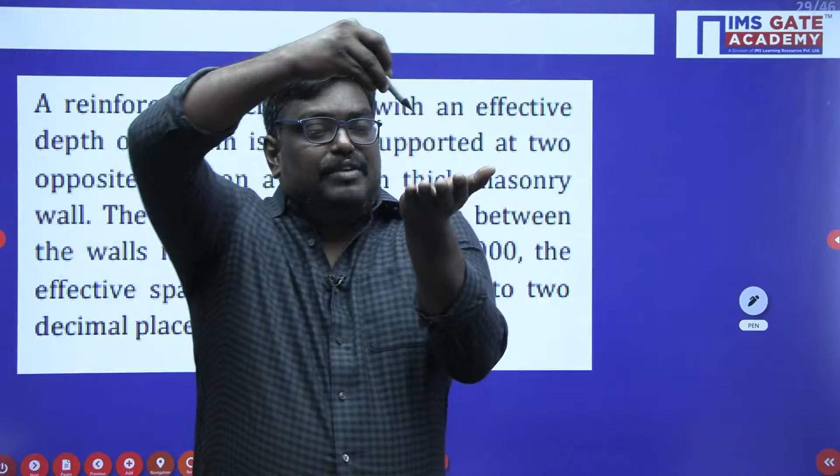Now see students, this is another important question. In a structure, what is a structure? It is a group of structural elements connected together. Suppose if a load is applied on the slab, it will be transferred to the beam and then to the column and then to the footing.

A reinforced concrete slab with an effective depth 80 mm, is simply supported at opposite ends on 230 mm thick masonry walls, with center to center distance of 3.3 meters. As per IS 456, find the effective span. Now see students, he is asking effective span of the slab.

Sir, effective span, we have. First we will discuss two cases. One is simply supported beam, because in this problem they have given simply supported beam. For effective span of simply supported beam, case A, it can be center to center distance between the supports.

Students, are you following? If you have any queries, please feel free to write in the chat box. So SSB effective span is nothing but the center to center distance between supports, or you can write clear span plus D. If it is for cantilever, it is clear span plus D by 2.

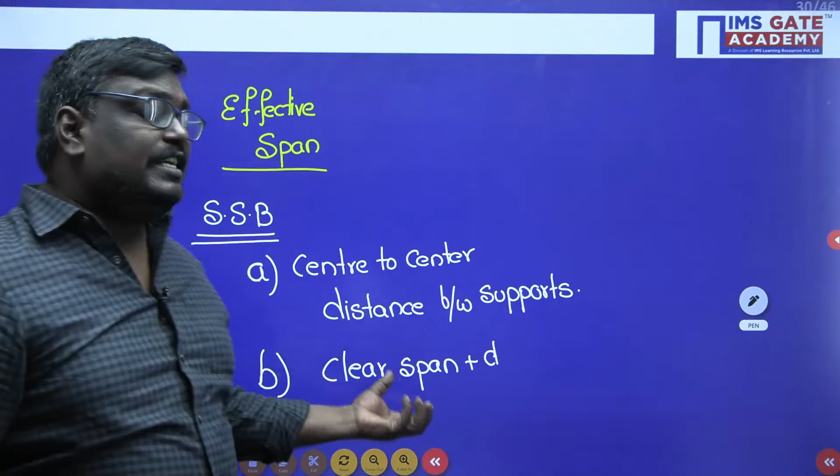So out of these two, which will be your effective span? Remember, my dear students, the smaller value will be taken as effective span. Are you following, students? I hope you are clear. So what is the effective span, sir? It is the center to center distance between the supports, or clear span plus D.

Let me tell you one important thing here. What you have is a simply supported slab, and here there is a wall of thickness 230 mm, or you can write it as 0.23 meter. Now if the center to center distance is 3.3, how can you write clear span?

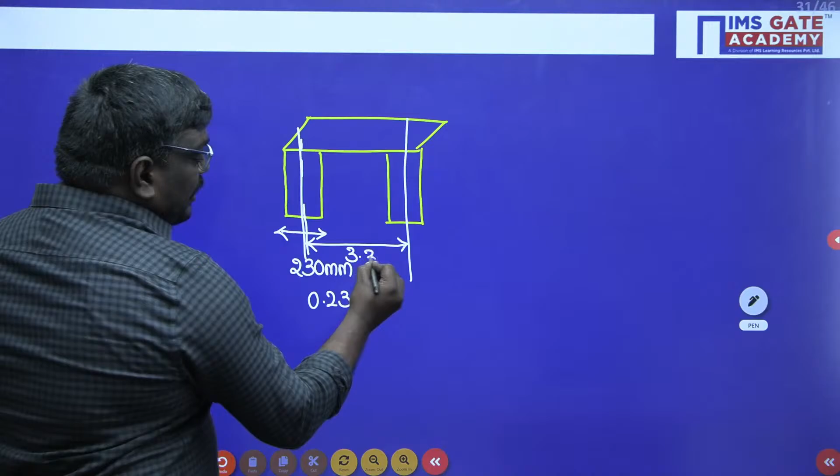Sir, clear span will be this distance. So clear span can be written as center to center distance minus thickness of wall. From the diagram, clear span equals center to center distance minus thickness of the wall. Here center to center distance is 3.3 minus 0.23 meter.

You will get clear span as 3.07 meter. Now what is the other formula for effective span for simply supported beam? It is effective span equals clear span plus effective depth D. So clear span is 3.07 meter plus effective depth 80 mm, which you can write as 0.08. So the final answer you can write as 3.15 meter.

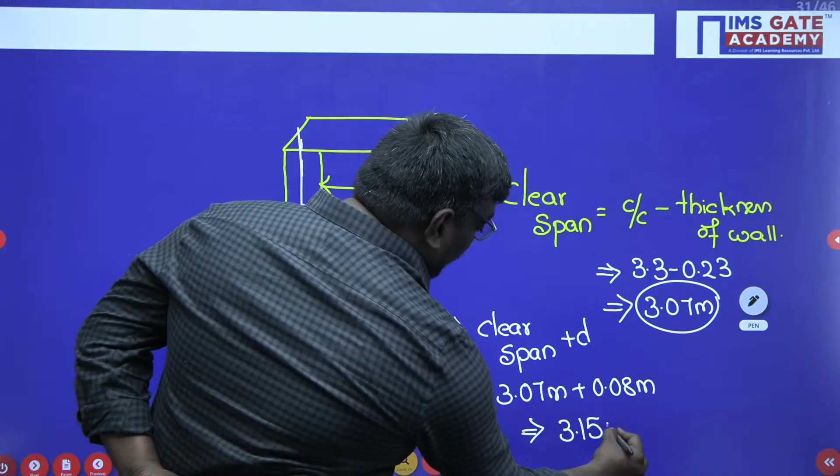Final answer, how much, students? You can write the final answer as 3.15. I hope the final answer 3.15 meter will be the minimum. Between 3.3 and 3.15, which is the minimum? 3.15 is the minimum. I hope this solution is clear.

My dear students, whenever you are preparing for the GATE exam, for the subject RCC, you should be aware of the code. So the key point in this question is, according to IS code 456, there is a clause that the effective span of simply supported beam is the center to center distance between the supports, or clear span plus D, whichever is the minimum.

If you talk about cantilever beam, it is clear span plus D by 2. I hope you have enjoyed this question.

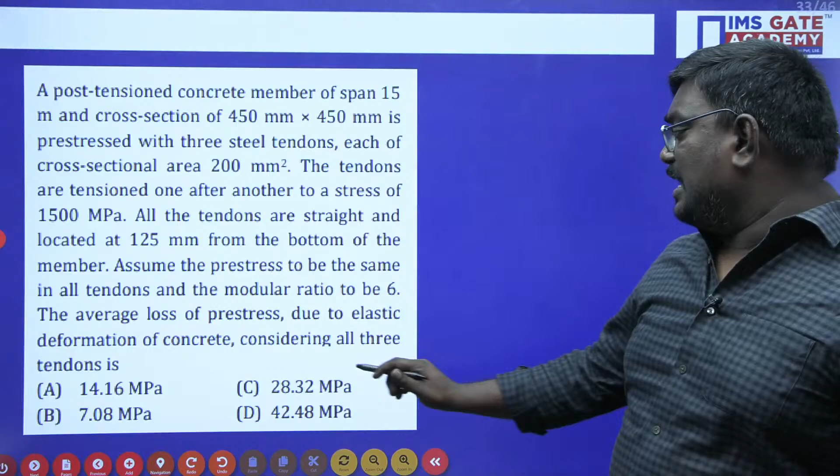My dear students, there was a question in a post-tensioned concrete beam asking for the elastic deformation of concrete. Please read the question carefully.

A post-tensioned concrete member of span 15 meter and a cross section of 450 into 450. Each cross-sectional area is 200 mm square. The tendons are having a stress of 1500 MPa. All the tendons are straight, located at 125 mm from bottom, and the modular ratio is 6.

There are various losses in pre-stressed concrete. Loss due to elastic shortening: when all the wires are tensioned at a time in post-tension, there is no loss due to elastic shortening. If they are tensioned one by one, there will be a definite loss.

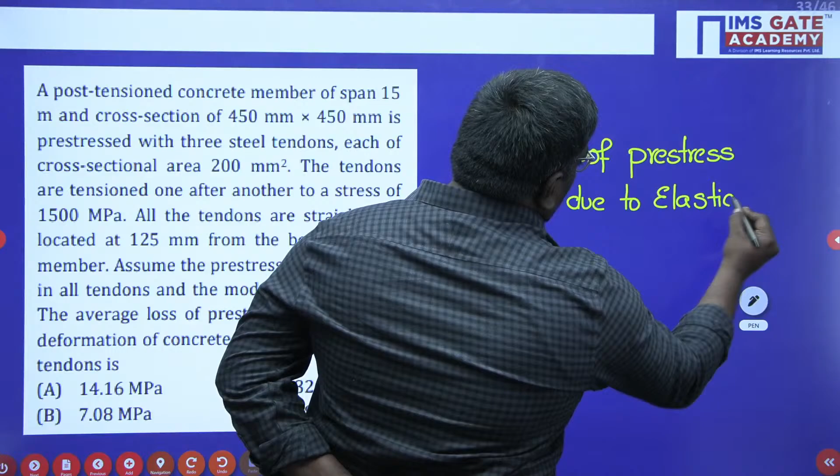So when I talk about the loss of pre-stress, the loss of pre-stress due to elastic shortening is given by the formula M into FC.

Here you should be clear what M means. M is nothing but modular ratio, which is the Young's modulus of steel upon Young's modulus of concrete.

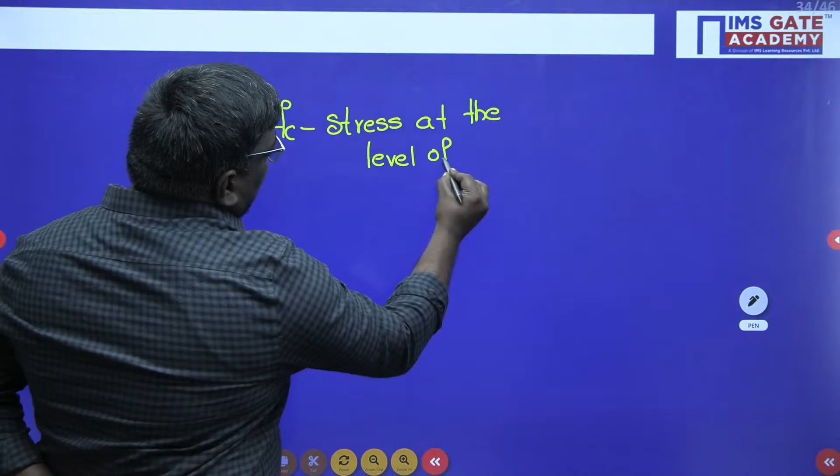Now what is FC? FC is nothing but the stress at the level of steel. So when I talk about the stress at the level of steel, FC, you have this point.

FC can be written as load upon area plus P into e square upon I. So this is FC.

Why? Because if you take a pre-stressed concrete beam, the steel will be somewhere here. If I consider this as neutral axis, usually when we talk about section modulus, we take it at the extreme fiber. So when they tell you stress at the level of steel, it means the distance from neutral axis to the steel plate, which we usually call eccentricity.

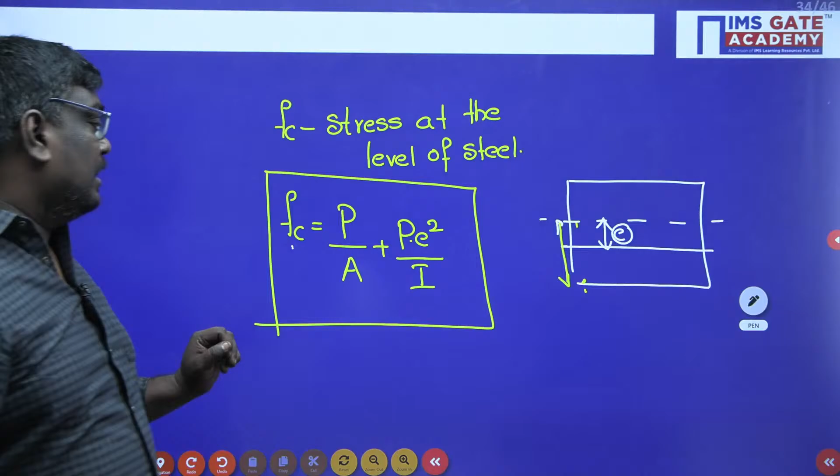First we have to calculate the load. Load is nothing but stress into area, so load is equal to pre-stress into area. Area of each tendon is 200 mm square, and they have given 1500 into area 200. So you can write it as 300 into 10 power 3 newtons, or 300 kilonewton.

Now how do I calculate FC? FC is nothing but load upon area. Load is 300 into 10 power 3 upon area. Area of the section is 450 into 450.

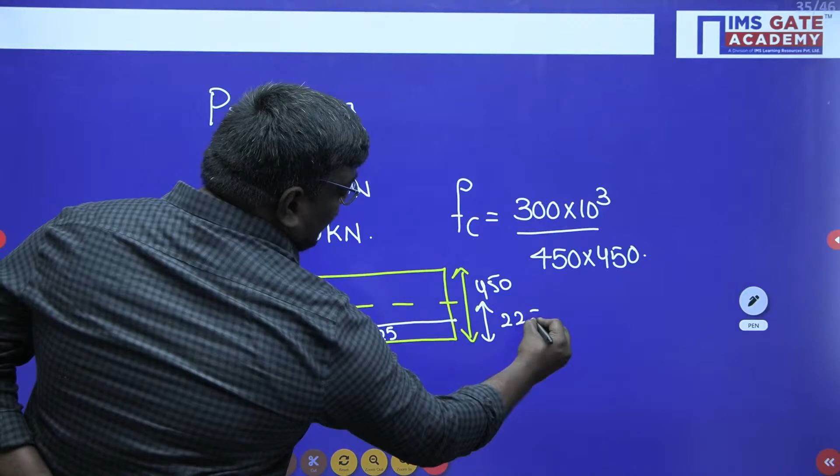Now how do you calculate eccentricity? Here we have a rectangular beam. If I consider this as neutral axis, the depth is 450 mm, so half of it will be 225 mm. They have told that tendons are placed at a distance of 125 mm from bottom. So actual eccentricity will be equal to 450 by 2 minus 125, which gives eccentricity equal to 100 mm.

So load into eccentricity square upon I: load is 300 into 10 power 3, eccentricity square is 100 square, upon I. What is I? It is nothing but BD cube by 12, because for a rectangular section it is BD cube by 12, so 450 into 450 cube by 12.

Now, what is the stress at the level of steel? If you solve this, you will get a value of 2.36 Newton per mm square.

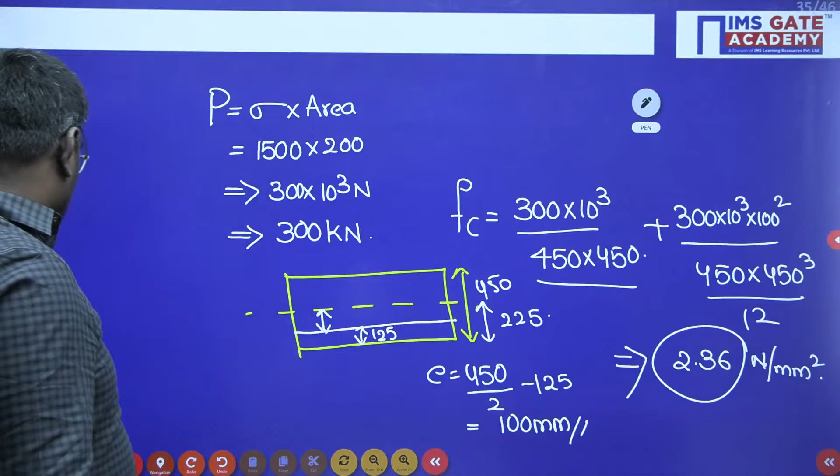Now, the loss of pre-stress due to elastic shortening is given by the formula m into Fc. Here m is nothing but the modular ratio, which is 6, and Fc is 2.36. So this will be equal to 14.16 Newton per mm square.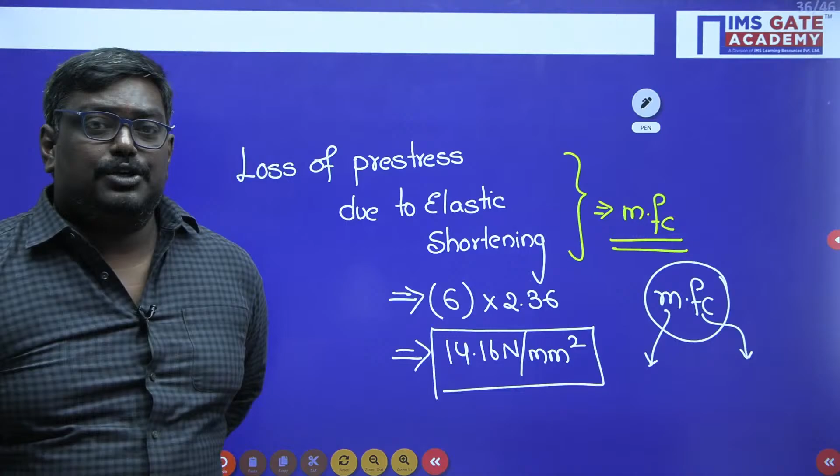So you should be aware of the key point of how to calculate the loss of pre-stress due to elastic shortening. It is calculated by the formula m into Fc, where m indicates the modular ratio and Fc indicates the stress at the level of steel. Modular ratio is the ratio of Young's modulus of steel upon concrete, and Fc is the stress at the level of steel.

Now we have a beautiful question here. A rectangular post-tensioned concrete beam of span 10 meter, width 150 mm and depth 300 mm is pre-stressed by a cable of initial stress of 1200 MPa. The cable is parabolic with an eccentricity of 50 mm towards the tension zone. Coefficient of friction is 0.3, wobbling constant is 0.0015. The question asks what is the percentage loss of pre-stress due to friction. This is a very important number.

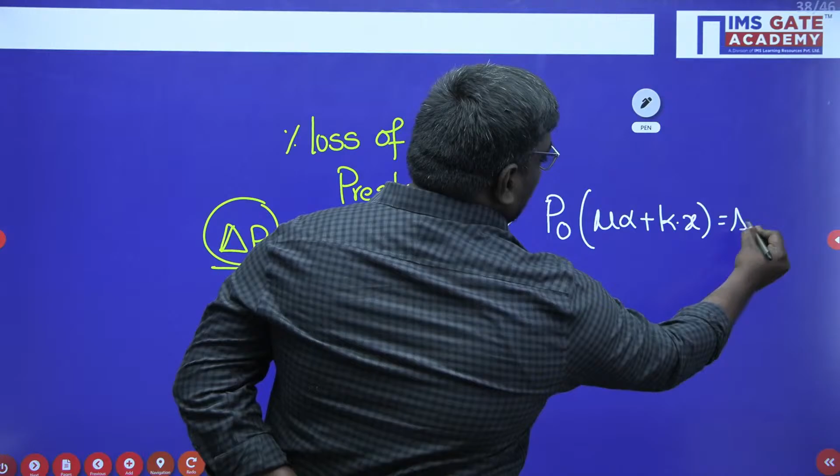Percentage loss means delta P upon P naught into 100, that is, change in or loss of pre-stress by initial pre-stress into 100. But if you ask what is the loss of pre-stress, you can write it as P naught into mu alpha plus K into X bar. This is the formula for delta P, the loss of pre-stress. Here P naught is nothing but the initial stress.

Let me tell you one important thing about friction. If the cable is tensioned from one end, it will be taken as P naught. If the cable is tensioned from both ends, this is very important. When solving the problem, they can give you cable tension from one end or from both ends. If it is tensioned from one end, we take it as P naught. And mu is nothing but the coefficient of friction.

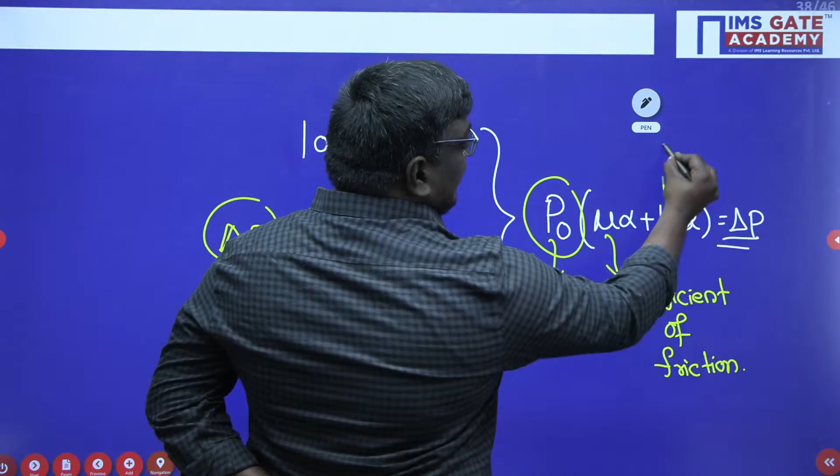What is K? K is called the wobbling constant. What do you mean by wobbling constant? Suppose if I consider a wire, it will be flat like this, but due to the tensioning operation or anything, the wire might bend like this. This is called the wobbling effect.

And what is X bar? X bar is nothing but the length of the span. And what is alpha? Alpha is nothing but the cumulative angle in radians. K is the wobbling constant, and mu is the coefficient of friction.

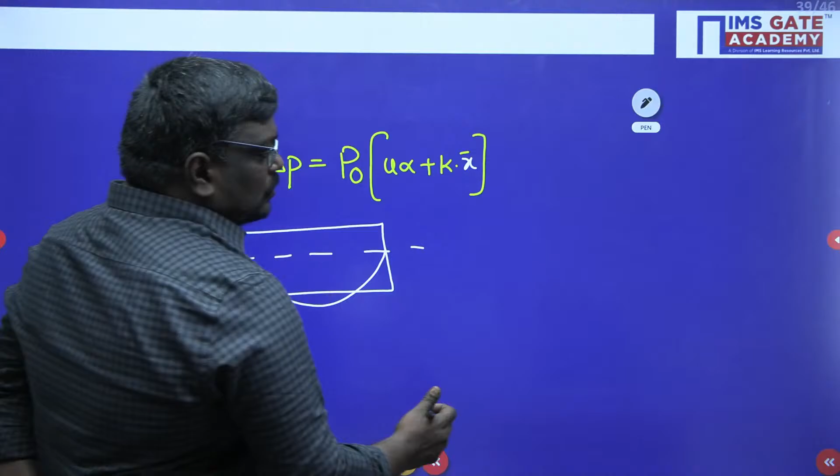Now let us solve this problem. Loss of pre-stress delta P can be written as P naught into mu alpha plus K into X bar. Everything is given in the problem except alpha. The tendon is parabolic, so we have an angle theta, theta 1 and theta 2. Alpha can be written as theta 1 plus theta 2. Because it is symmetric, you can directly write it as 2 theta.

In some cases, theta 1 and theta 2 might not be the same, so how do you calculate theta? We know dy by dx is nothing but the slope. We know y is equal to 4h by L square into x into L minus x. If you solve dy by dx, you get 4h by L square into L minus 2x, where x is the distance from the supports. So dy by dx equals tan theta, and tan theta can be written as 4h by L. For small values of theta, tan theta can be written as theta. So theta is written as 4h by L, and we find what alpha will be.

Theta plus theta, that is 2 theta, which is equal to 2 into 4h by L, which is equal to 8h by L.

Sir, you might ask how I got that. In a parabolic equation, the generalized equation of parabola, which you might have studied in structural analysis, is Y equals 4h by L square into x into (L minus x). This is the standardized formula for a parabola, so using this, I've calculated this.

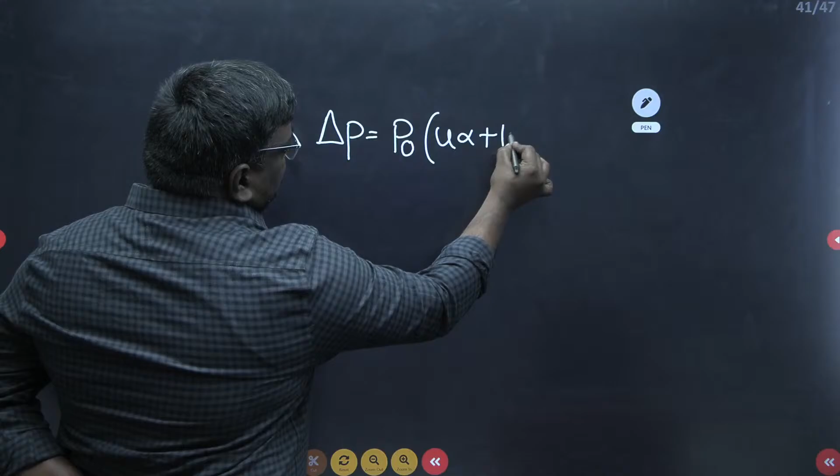Now what? Let me tell you how I calculate. Delta P is equal to P naught into mu alpha plus K into x bar. So here I have to calculate alpha. Alpha is nothing but what, my dear students?

Alpha is 8h by L. Here h is nothing but the eccentricity, which is equal to 8 into 50 mm, upon length which is 10,000. So if you solve this, alpha will be taken as 0.04.

Now you know everything. Delta P can be written as P naught into mu, which is 0.3, into 0.04 alpha, plus K, which is 0.0015, into x bar, the length of the span, which is 10. On solving this, you will get 0.027 P naught.

Now what do we have to do? Delta P by P naught into 100. If you solve this, you will get 0.027 P naught upon P naught into 100, which gives a value of 2.7 percent.

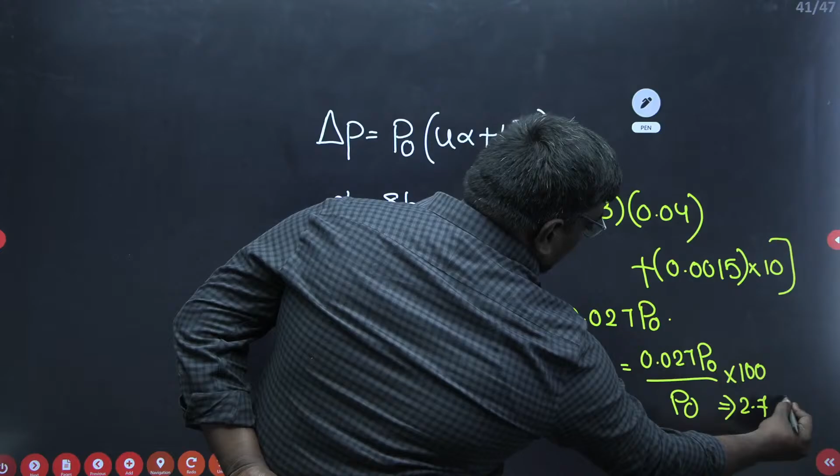So the percentage loss of pre-stress due to friction is 2.7 percent. Again I am repeating: whenever there is a loss due to friction, it is clearly evident that this loss is observed only in post-tension. There is no loss due to friction in pre-tensioning members, that's the first point.

The next point is the loss of pre-stress due to friction. Delta P is given as P naught into mu alpha plus K into x bar. Here, P naught means the initial stress. If it is tensioned from one end, it will be P naught. If it is tensioned from both ends, it will be P naught by 2.

Mu is the coefficient of friction, alpha is the cumulative angle in radians, K is the wobbling constant, and x bar is the length of the span. Based on this formula, just plug in the values. Alpha is the cumulative angle in radians, and in some cases this value will also vary, for instance if the eccentricity forms a parabola, the height of the parabola will be this one.

If you see in my gate score booster, I have done this kind of problem also. I think losses of pre-stress have high chances of appearing in this year's exam. I hope you have enjoyed this question. Now let us go into the last question of today.

A pre-stressed rectangular beam 250 into 600 mm is pre-stressed by 4, 14 mm diameter wires located at 200 mm from the soffit of the beam. The effective stress in the steel is 700 MPa. What is the maximum bending moment due to applied load?

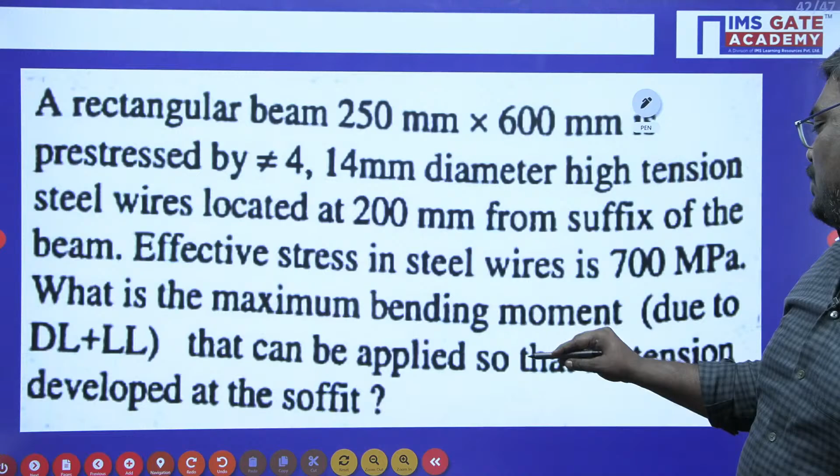So at the soffit means the bottom. You should know that soffit means bottom. First of all, let me tell you the stress at the bottom is given by the formula: first, due to direct load.

The stress due to direct load is given by load upon area, P by A, plus the stress due to the moment. The stress due to the moment is, moment can be written as P into E upon Z. What is Z? Section modulus. How did P E by Z come? You know M by I equals F by Y.

M by I is equal to F by Y. Here bending stress can be written as M by Z. So this is the stress due to eccentric loading, minus moment due to dead load plus moment due to live load, upon section modulus.

Now, to avoid tension, this value will be equal to zero. So using this equation, P by A plus PE by Z can be written as moment due to dead load plus moment due to live load upon Z.

So first of all, we should calculate what is the load in this problem. Here, the steel wires are located at 200 mm from the soffit. So if you calculate, the eccentricity will be equal to 100 mm. I will tell you how.

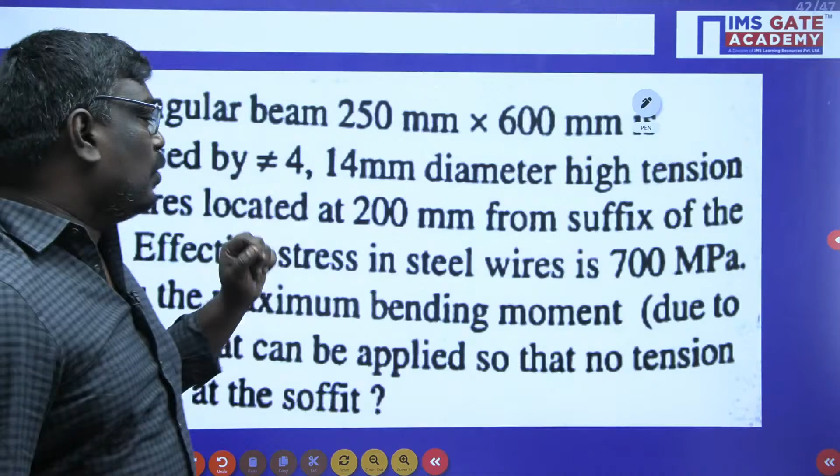And the effective stress is 700 MPa. Effective stress is how much? 700 MPa.

Sir, see, eccentricity is nothing but - if you consider this section, it is 600 mm total, so the stress center will be 300 mm. And the wires are located at 200 mm from the soffit. So what will be the eccentricity? 600 by 2 minus 200, you will get a value of 100 mm. So you got the eccentricity.

Now how do you calculate the load? Load is calculated as stress into area of the steel. Stress given is 700 MPa, and area of the steel is 4 bars of 14 mm square. So my dear students, if you solve this, you will get 700, 4 cancel, it will be 196, or you can say 200.

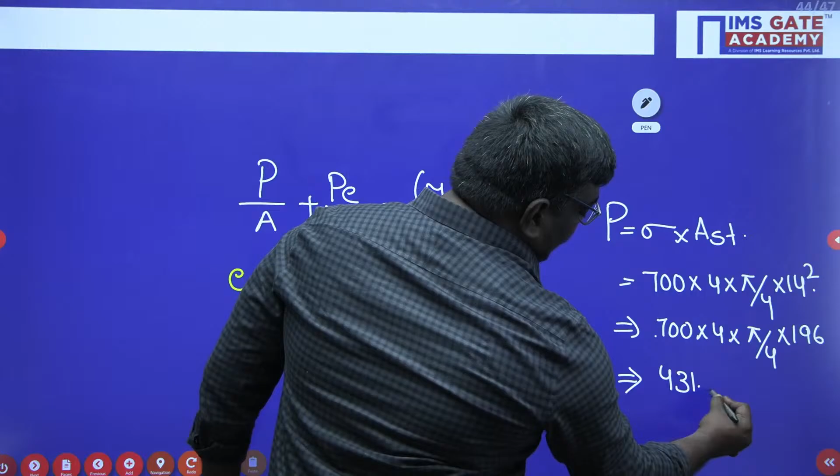700 into 4 into pi by 4 into 14 square is 196, right? So 0.7, 2.1, so you will get a value of 431.2 kilonewton. Agree, students? Now you calculated the load, you know the eccentricity, and what is the section here?

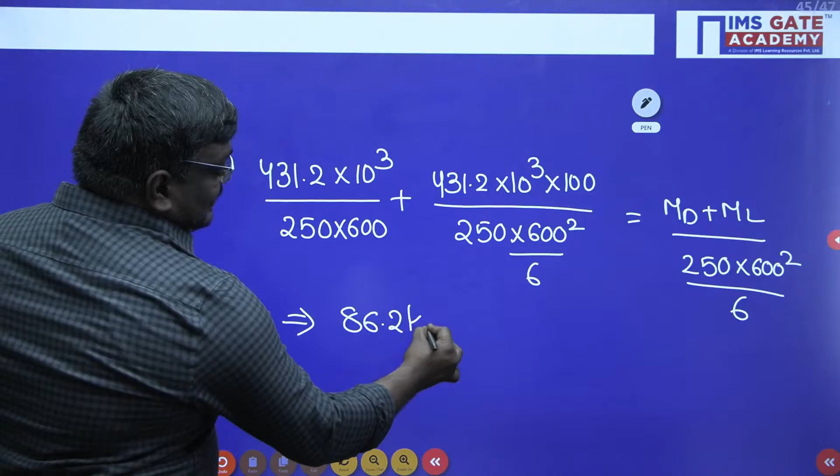So my dear students, whenever you are preparing questions on RCC, please be cautious. Please go through the IS 456 code, and if you have time, just go through the formula sheets. Definitely for LSM method, shear and losses due to pre-stress, you will have a better advantage.